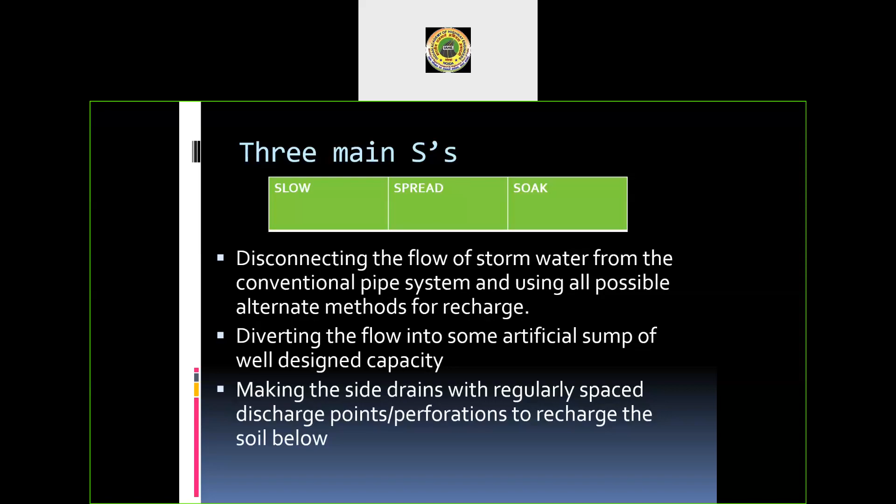Thanking you. Good morning Mr. Gupta, and all the participants who are here and already joined and likely to join. Let us make this session very much interactive. If any question comes to your mind, don't hesitate to ask, so we can resolve it then and there and proceed further. Now introduction part is over, and let us hope all participants will continue right up to the end, so that there is not a single point they miss out of this presentation.

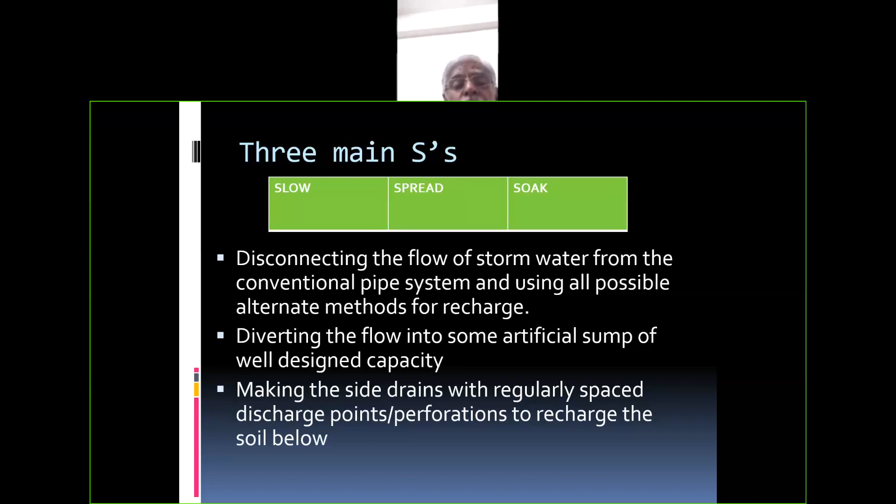Sustainable stormwater management is the topic of our project here, the subject matter we are going to discuss today. This particular thing has been of great value, particularly to...

Can you see the audio? Can you see the video? Yes sir, yes. Can you see the slide also, can all of you see it? It's quite cloudy here, maybe there is some issue with the network also. But am I audible clearly? Yes sir, yes sir, yes sir.

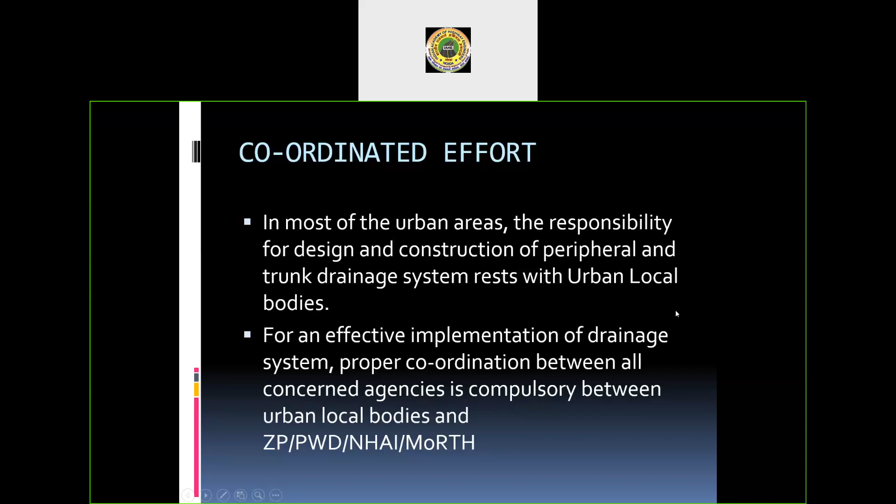Good, let us proceed. Sustainable stormwater management is the topic which is of great value to people dealing with drainage in our urban situations. Urban situations are developing cities, the smart city development we have undertaken, and all these new expeditious efforts from government as well as local bodies, which have been adding to the road width and road length in our cities. This is also of great value to areas which have large amount of rainfall, concentrated rainfall during a period of 2 or 3 months.

Maybe the current season is the befitting season for discussing this particular topic. All the rainfall that falls on the impermeable surface we create because of the widening and lengthening of roads in cities as well as rural areas - presently we find that many road network projects we do, highway projects particularly state highways and national highways, they are of...

...rigid pavement type. Now rigid pavement cannot allow rainwater to percolate down below, and as a result there is a large receiving surface which is concentrating the entire thing into the stormwater drains on both sides of the road, and then leading into the culverts or whatever cross drainage arrangements we have made - bridges, small minor bridges, rivers, rivulets - all these things are then concentrating into a final storage somewhere, maybe likely in the nearby lake or nearby sea.

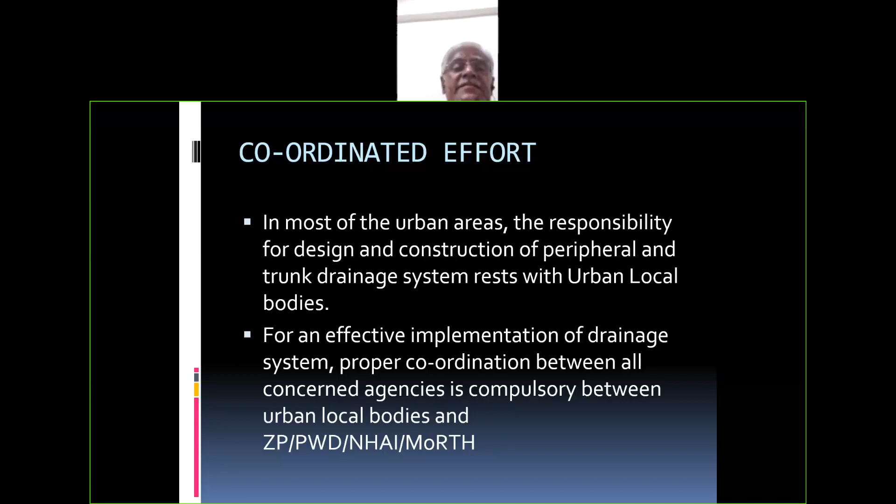Pavement, and as a result, if the rainwater weakens our soil, there is distress in the pavement which has been designed considering a particular CBR value, and the CBR value goes down because of full saturation of soil, which is carrying the embankment and the pavement on the top of it.

Now, this stormwater drainage that we have to properly channelize and manage is of importance to the rural as well as urban areas, as I already told you. But in the urban areas, we are getting more and more of stormwater because of the receiving surfaces of the buildings and other structures. And in the current scenario, we find that there are lot many flyovers, the railway over bridges and other structures, even the metro railway bridges that we have in our cities.

So these are the receiving areas, and they receive a lot of rainfall, which gets concentrated into the drainage arrangement that we make. If the drainage arrangement is not properly designed, the stormwater is likely to create flood-like situations on our roads and also on the other structures. We find that in the initial rains, there's accumulation of water on the top of our flyovers because of the clogging of those drains that are already there.

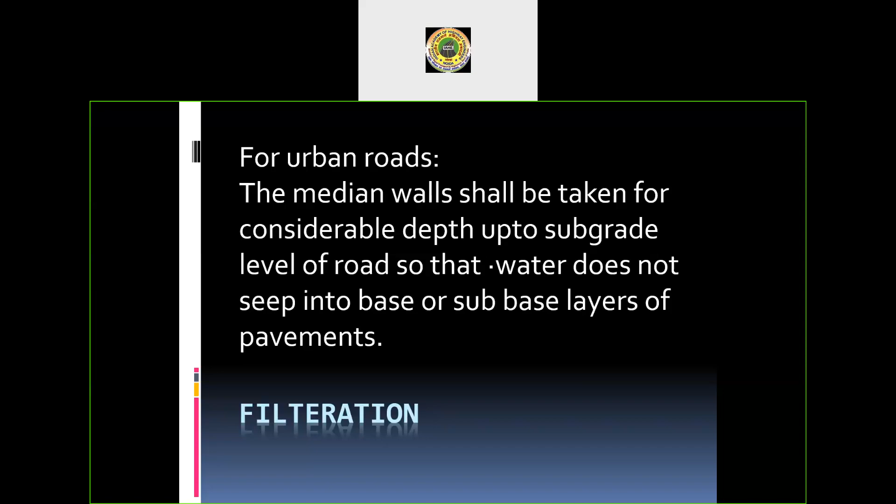So stormwater management is therefore very necessary, very important, particularly in the urban situations where a lot of population is put to great inconvenience. They can't reach their office, they can't reach their airport or railway station because of the flooding on the road, the traffic getting slowed down, and a lot of traffic jams happening, particularly during the rainy season. So this is the importance of this topic that I would like to now give you in greater detail in the forthcoming slides. Next one, please.

You can have the data from the meteorological department for the place where you are actually working. And the design is based on this collection of data for a long period of time, so that our drainage system in the cities is properly designed and that really serves our purpose during the peak season of monsoon.

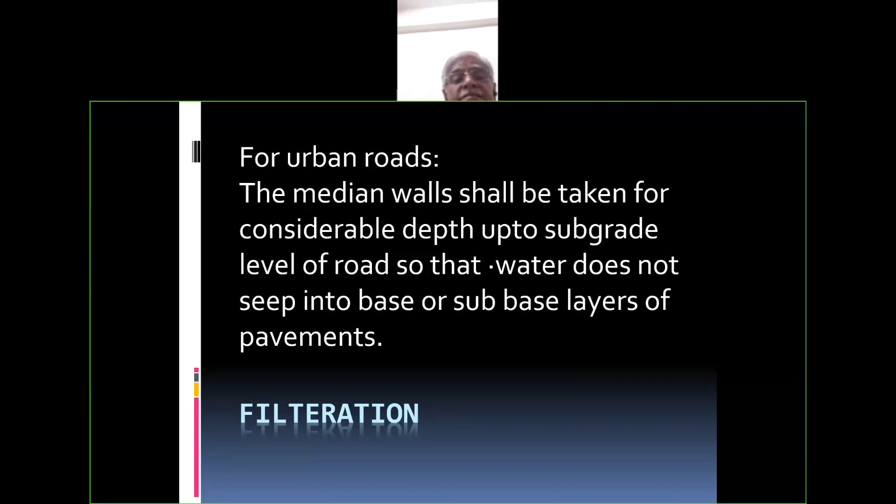That is what we experienced on 26 July when the rainfall was more than 900 millimeters in 24 hours, and that was a very big, unusual thing that we experienced in the city of Mumbai, where the population is 20 million plus.

So then the local authority, the Municipal Corporation of Greater Mumbai, started working on this. They were already having a system in place, but the implementation and augmentation of that particular system was very, very important, and that was to be done in a short duration of time. So the estimated budget for implementing the project was more than 12 billion with 2005 as a base year. Now the existing system was more than 70 years old, and as I said, lot many roads, 7 road corridors. I myself was in charge of developing them between 2008, 2009 and 2010, where we widened the roads.

So naturally, the receiving surface was increased, and that entire area was required to be drained into the nearby sea, where the water reaches through a river named Mithi. And whenever there is a high tide, and on that particular day also it was high tide, the river was not flowing into the sea, but the sea was flowing into the river. As a result, there was a reverse flow, and the entire city got flooded very dangerously, and everybody was trapped where he was. Nobody could reach home.

Actually, the entire night, I myself was in my office, sitting on the top of the table by putting a chair on the top of the table. That was the situation in many places. Many colleges had asked their students to go onto the terraces of the college building, and all that had happened.

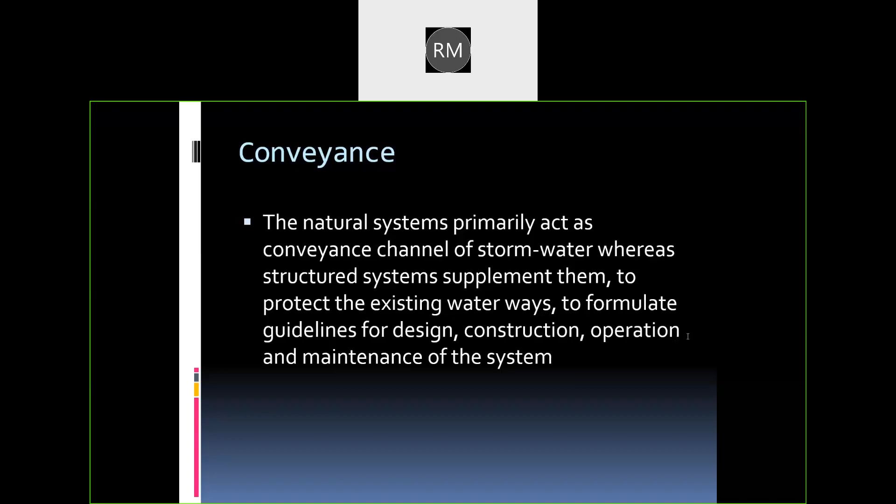There are pickup weirs that we can construct at some rivers or rivulets, so that there's accumulation of water for drinking. Some water treatment plants are to be installed, the water is to be made potable, and those things we do. But all this effort really helps us in recharging the thirsty ground.

So we should think of all these things at the DPR stage itself in a particular project, so that there is no confusion about going ahead with the storage arrangements of water all along, because we will drain into the side drains, and the side drains will have to be channelized in such a way that rainwater harvesting or conservation is possible if we plan it right in the beginning and do the digging or borrow area excavation in a planned way.

Hello. Yes, sir. Am I audible? Audible fully, sir. Okay. Good. Next one, please.

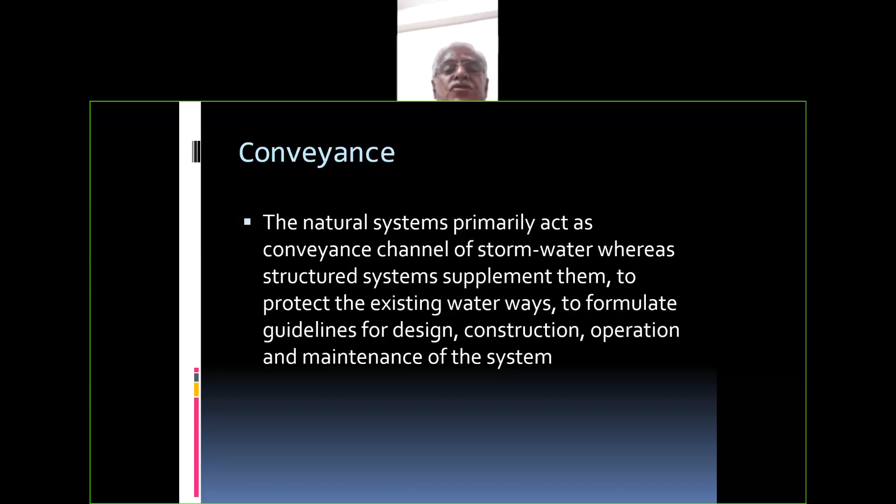Not only this, in urban areas, the urban authorities do not have a properly trained and well experienced design team which will be able to do the designing of the urban drainage. So the city engineer may or may not have such a team.

So the highway engineers can always help them by proper planning of the drainage inside the city, which normally they will allow and meet our drainage system on the highway, which may be in the form of a bypass around the city or something like that, and they try to take help of that system. So if that system is to function properly, then we must have a coordination with the local authority.

I'll ask them how they are planning to drain out and help them to plan such a thing so that our system will not be overloaded and our design will not fail. So that type of a thing needs to be done by proper planning and coordination with the local authorities wherever our highways are passing around the city or through the city, so that both the purposes of proper drainage and storage, even the rainwater harvesting, are fully and properly served during the entire life of the project.

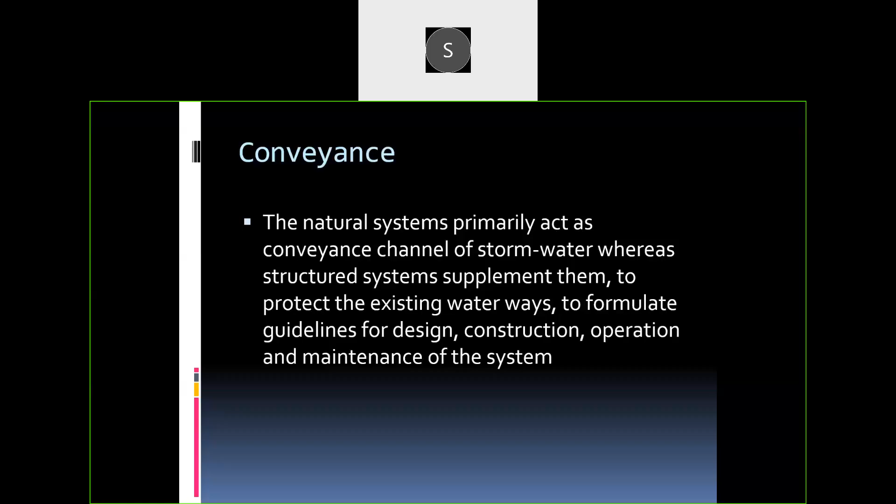So this thing we must remember while doing our own DPR preparation, and we must have a coordination with these people. And that should be a continuous coordination. It can't be just for a day or two. We must have a proper planning and execution, because they will be executing their drainage system in a particular way because of the road levels.

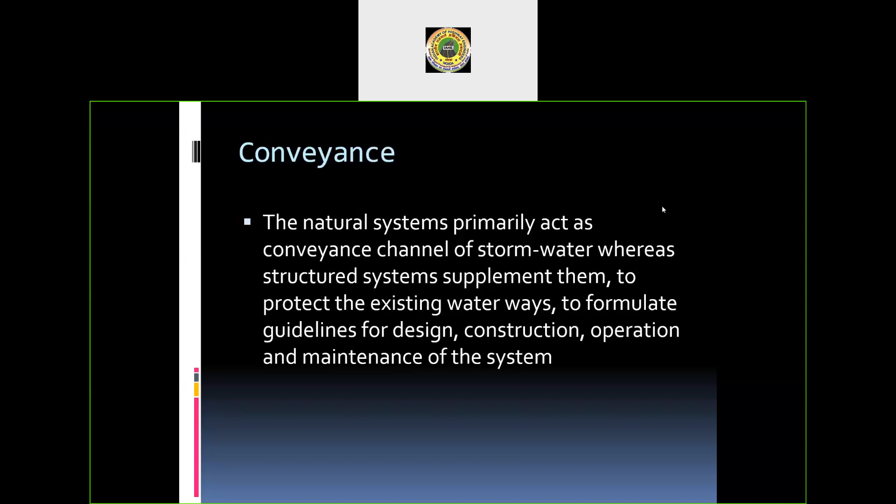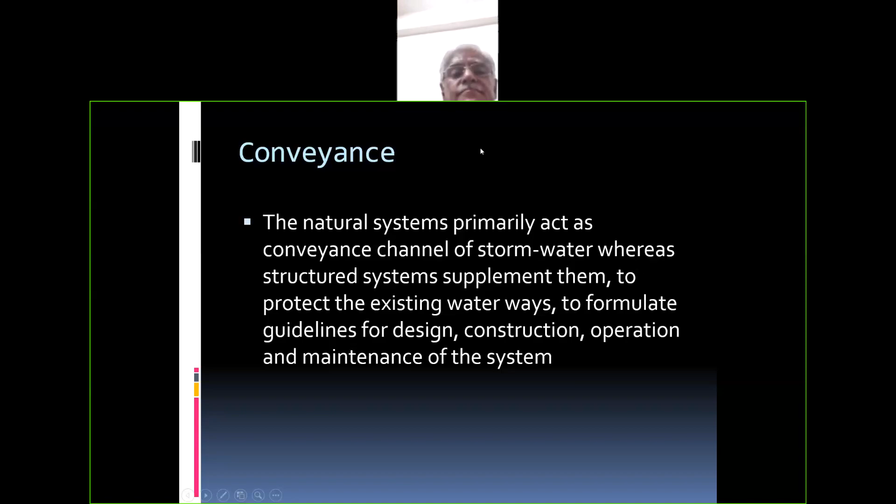Mostly in the cities, they are not much higher. They are not having much embankment. At many places, they are in cutting also. So they have a different challenge, and that challenge needs to be integrated with our highway system. Normally, we will have an embankment and we'll have a drain level which will be different from the levels which they are dealing with. So we will have to properly plan it out so that the cities will not get flooded, because our highway system is not permitting water from the city to drain out.

So that may require some storage arrangement at the end of the drainage system if the local authority have already planned and executed their system. Then we must have that type of additional arrangement of storing that water which is coming towards the highway but cannot pass through the system that we are trying to plan. So then we provide those sumps and storage arrangements in that vicinity of that town or city through which we are passing or we are bypassing.

Making the side drains with regularly spaced discharge points, perforations, to recharge the soil below, that I already told you. We need not have an impervious bottom of those side drains. We can have vertical drains, where we provide some perforations of design sizes, and we provide the permeable material, which will help percolate the discharge from the side drains.

I did not actually carry it right up to the other end of the side drain where it is discharging into the CD work, because if we overload the river or rivulet, that is also going to cause some flooding on the downstream side where a village or town is available. So that is why these three main S's are there. We have to slow down, we have to spread the water, and we have to soak it into the ground, so that recharging and other things are of help to everybody, not only to the highway engineer, but to the regular population also. Next.

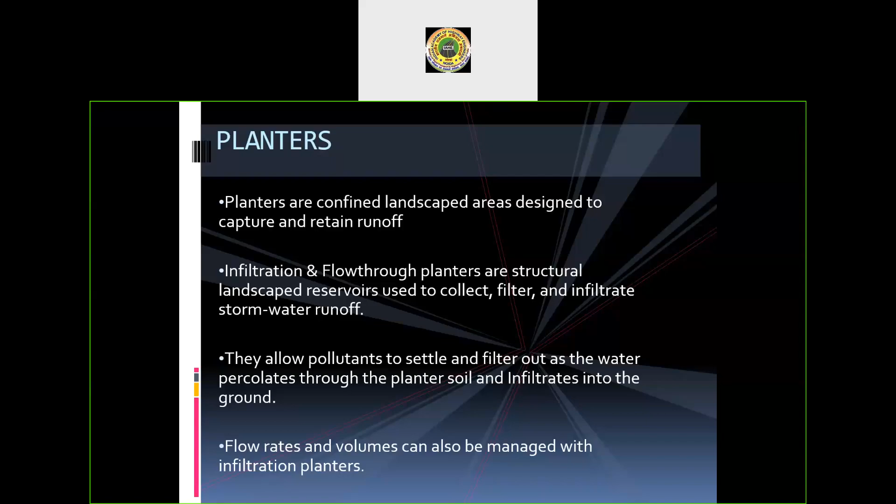Generally, the local body will have a plan for development of all the facilities inside the city, the roads, the bus shelters, and many other facilities, the hospitals, schools, and all those things for a period of around 20 years. So that is how they plan it. But we plan a highway maybe even for a longer period, because most of our highways are on a HAM basis or on the concessional basis. So they are for 30 years, maybe for 35 years of concession period.

So there cannot be a possibility of augmenting the capacity of the highway or the drainage system that we plan. So we plan for a much longer period, and there can be a mismatch between the planning done by the local authority and our planning. So we must have a proper dialogue with them, and a coordinated effort will be very necessary for all those who are dealing with projects which are in the vicinity of the urban area.

For an effective implementation of the drainage system, proper coordination between the concerned agencies is compulsory, and urban authorities like Zilla Parishad, the PWD, NHAI, MoRTH, they all should meet together, sit together, and try to plan out these things in a proper way. That will only relieve us of all things that we see, and the city comes to a standstill for a day or two in case of very heavy rainfall.

It happens not only with major cities, but also with smaller cities. So I think this coordination has been lacking for a number of years now. We already celebrated 75 years of independence, and we must now actually wake up to this particular requirement, which I think we have been avoiding. Okay, next.

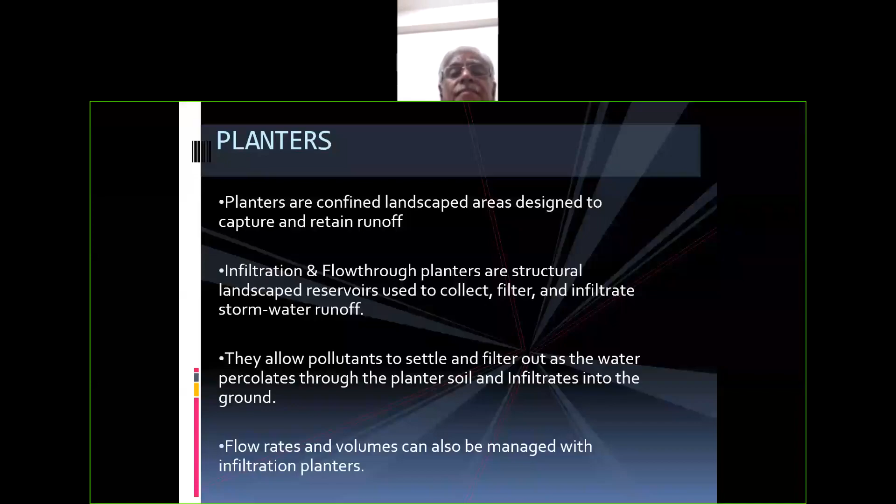So what happens, whatever water is on the other side, the higher side, comes onto the lower side, and the lower side drain at many places gets silted up, because this water will carry all the silt in the initial rainfall days at the beginning of the rainy season. All the silt will come and sit into these drains. Even if these drains have been desilted in the summertime, the very first rain will make it clogged.

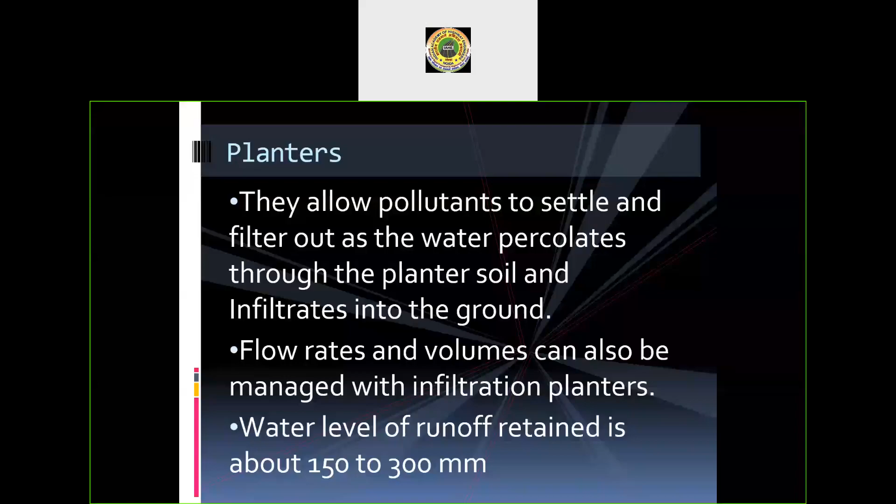I mean, all the drains which are there, the pipes that we have provided in the median, they also get blocked, and the drain in the median also sometimes gets silted up, and as a result, the capacity of that drain is inadequate, and that is how all these locations which are facing a situation like this will be giving us a lot of trouble in maintaining.

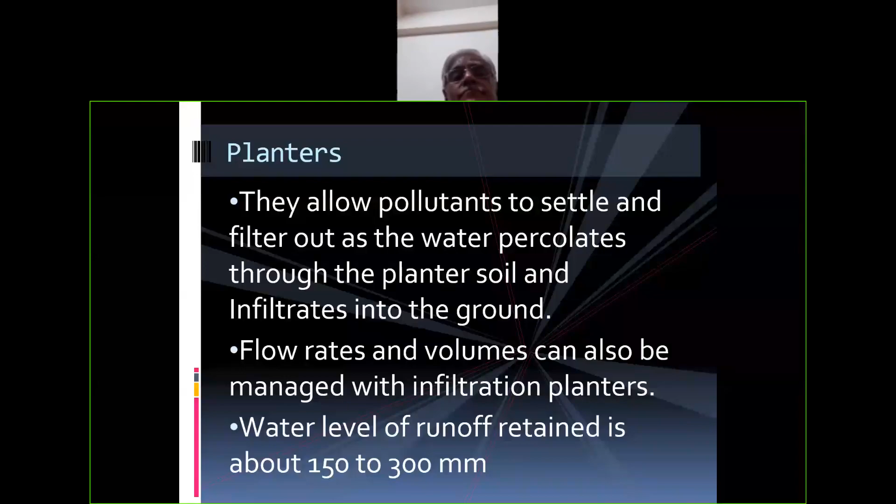And even at places in the cities I have seen, there's ponding where the slip road is there, when the left turning becomes impossible because of the accumulation of water, and the people have to go into the wrong direction or the wrong corridor to cross that particular spot. And as a result, there are accidents, slowing down of traffic, even standstills, and sometimes they come up to a chaotic condition, and hours are lost, not only of the working population, but of the people who have to now restore the entire thing in a very short duration of time.

They have to work overnight and see that the system is brought to a proper functioning condition before the next working day starts. So all these things are there, and for that, many of our people may not have availability of machinery and manpower and agencies who can do it so fast. So as a result, the road user in urban and also in the rural areas, in such situations where the curvilinear alignment is there, they are likely to suffer, and we have to avoid that. And for that reason, we must do all the planning.

We may even over design these drains. We may over design the cross walls, the median walls through which the water is required to drain into the other side, and make the drains perforated so that the water will go down, and there will be a clean road surface available for road users. So the seepage we must facilitate. We should not allow the vertical drains to get clogged, or if at all they are clogged, we must provide more and more drains, more and more vertical downtakes, so that the drainage is really effective and of use to the people who are likely to depend on that particular road portion for going to their place of work or other.

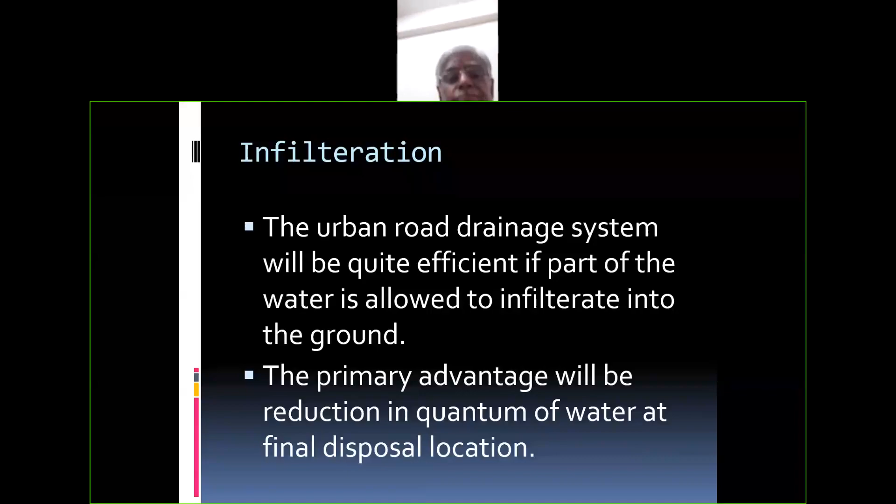Okay. Now, infiltration is the way. Infiltration is the way of taking this water into the ground. We may have a proper sub-base layer in the pavement, which will filter the water into the drain, which will allow the water to go into the drain wherever there is a super elevated road, and also it will allow water to drain into the subgrade.

Even in the subgrade, we must at times provide cross drains with perforated pipes, which are covered with what they call geotextile. So geotextile with perforated pipes has been a system of draining below the pavement, where the sub-base layer will allow water to get filtered into the ground, and then we provide systems so that water is carried across into the longitudinal drains.

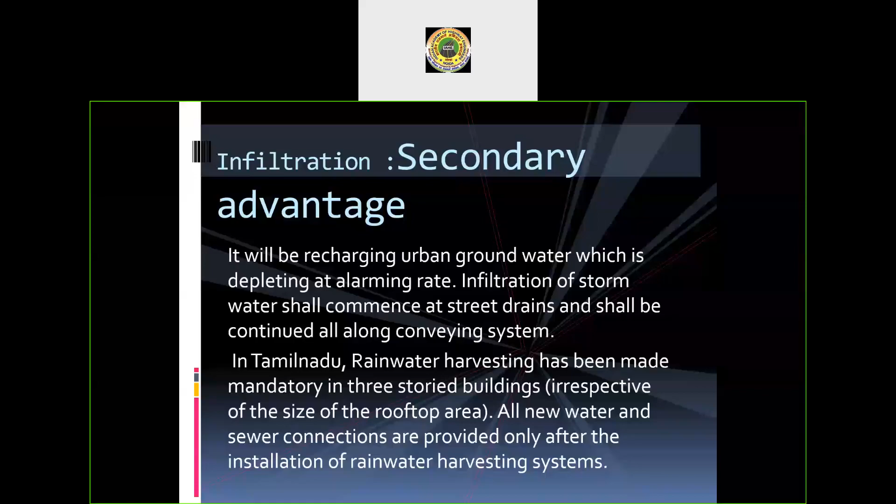This is provided considering all the geometrical and gradient requirements of the drainage system. This is a very effective way of taking care of a large or huge amount of rainwater that we receive on our impervious road pavement.

One way is to directly filter the water into the ground, that is infiltration, which we already discussed. The second one is conveyance. The natural system primarily acts as a conveyance channel of the stormwater drainage, wherever the structured system supplements them - that is, natural drainage in an area.

We provide the road gradient in such a way that natural drainage is possible. But in some places it may not be possible because of ground conditions, where there's a valley type situation, the road passes through cutting, or slopes down to a particular area, and there is likely accumulation of water. So there we have to see that things are properly designed and supplemented by a structured system, so that there is no lack of space for water to flow out in a short duration of time.

Time of concentration and rainfall, the total volume of rain we receive in a particular period - that is what we have to collect as data, so that we design the system in a structured manner and provide it.

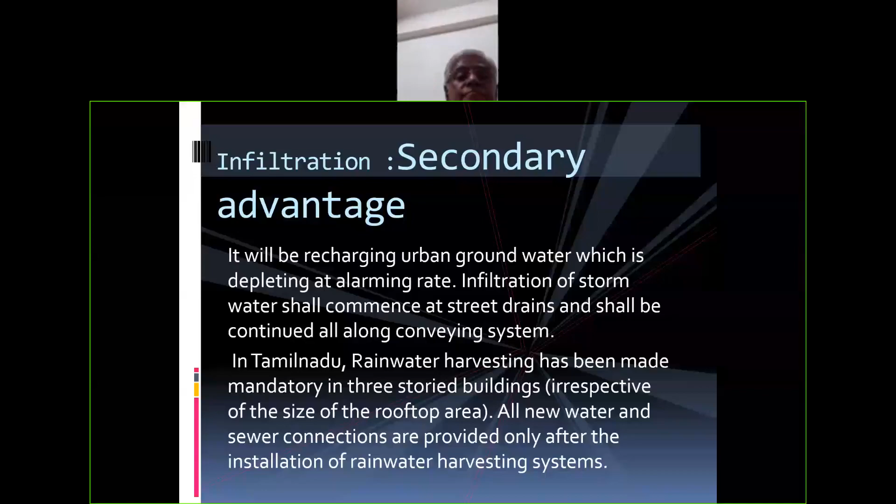These are things we must even think of at the preliminary design stage of a particular project. There is wide formulation of guidelines - there are IRC codes. All these have been made available to us. But the IRC codes will guide us only in a normal situation.

In a particular situation where things are quite different from normal, or challenging, we must ensure these systems don't fail, and are designed for a better capacity compared to what is advocated in the guidelines. Guidelines are for our guidance, not for just sticking to them and making our system unoperational.

In case of an emergency, you can imagine an ambulance waiting because it cannot cross that particular stretch of road, and things are chaotic. As highway engineers or road engineers, we cannot allow that. If that is the situation in our cities or habitable areas, nobody is going to excuse the engineering fraternity.

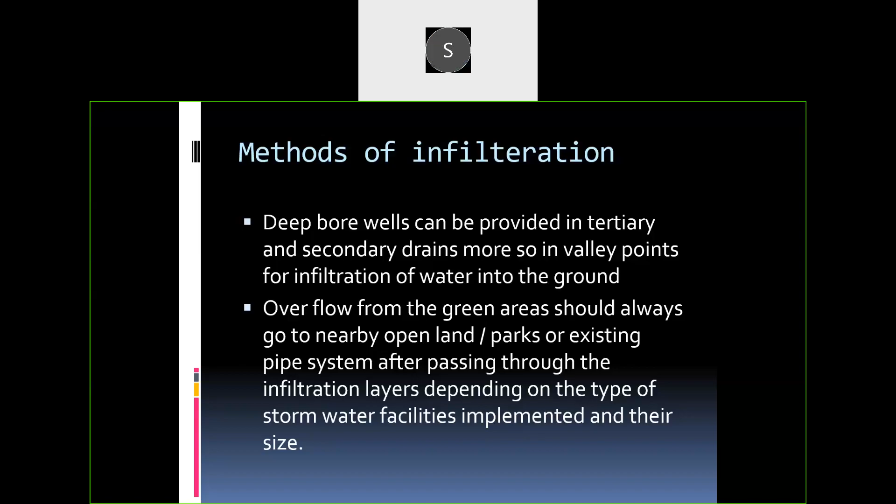Conveyance to a point which is possible - it may not be the same point that is on our site, it can be a different point, a different storage arrangement, or a point on the other side of the road where borrow areas have made storage facilities available. All these things can be integrated to provide adequacy of drainage without depending on existing structures designed and constructed long back.

So whenever we widen a particular bridge, a lot of water collects on the top. The water spouts have to drain into the river directly, concentrating all the rain accumulation on top of it before it goes into the river.

The linear waterway normally provided for the earlier 2 lane bridge is kept the same even for the new bridge, unless there is a real necessity of reconstructing the old bridge to provide a better waterway. Then we demolish the old one and construct a new one of longer length with a better linear waterway, considering the flooding conditions and development between the earlier design and the current situation.

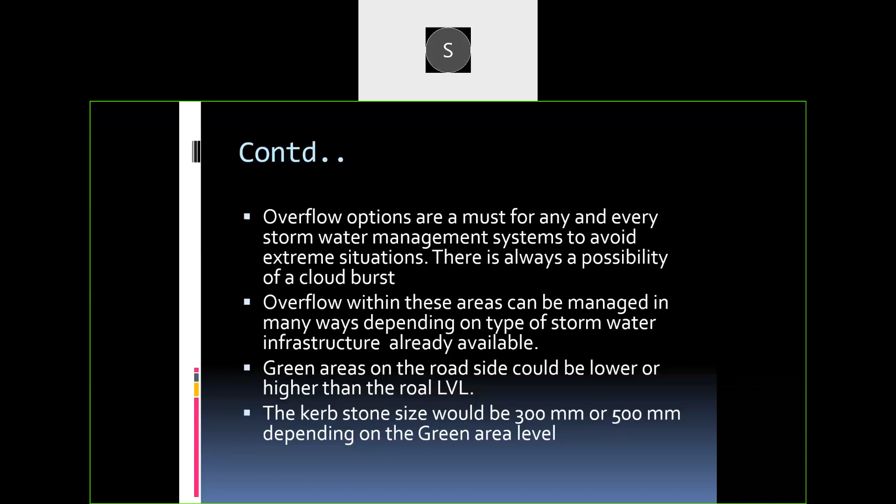So that runoff has to be captured by these planters, so that the velocity of flow is also reduced, and the total volume of flow is also reduced, so that the drainage system functions in an adequate and efficient manner.

So infiltration and flow through the planters are structural landscape reservoirs used to collect, filter, and allow infiltration of the stormwater runoff. These are things that slow it down.

We said there are three S's that we have to follow. So we are trying to slow it down, and we are trying to provide a landscape.

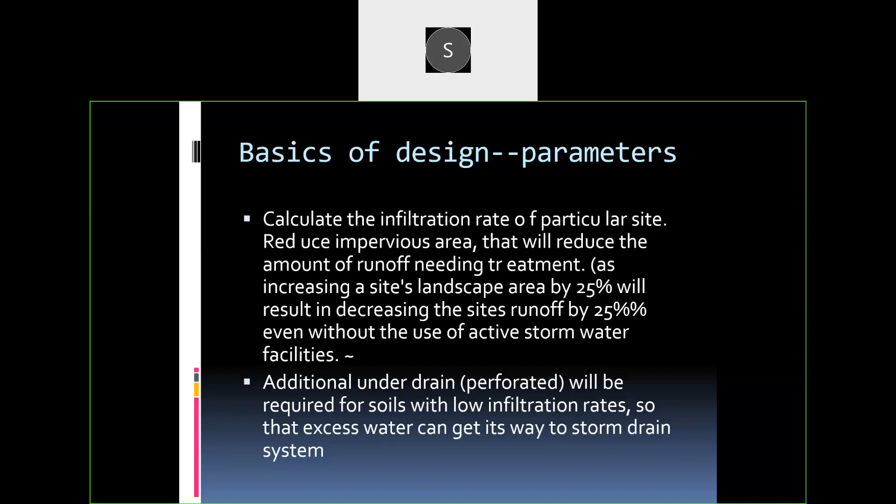Now see, wherever there are interchanges, you'll find there's a big area within the road that we have constructed around that interchange. That entire area needs to be properly landscaped, so that drainage in that area is possible, and there is no accumulation of water leading to breeding of mosquitoes and other filthy conditions that we are likely to face.

So there we have to provide and design the drainage system in a more efficient way, so that big confined areas in an interchange do not become a source of health hazard for road users or for passers by who may be staying near that area, or using it for their morning walk. All those things we have to plan so that landscaped reservoirs are constructed at such areas, so that water is duly channelized into those arrangements.

So the pollutants in the flow - that water flowing a long distance carries a lot of minerals and chemicals also sometimes. So they will allow the pollutants to settle and filter out as the water percolates through.

That is the advantage of making our highways greener: soil erosion can be avoided, and infiltration of water can be ensured into the ground through these planters. The flow rate and volume can be managed and reduced so that erosion can be avoided, and all the healthier conditions can be ensured there.

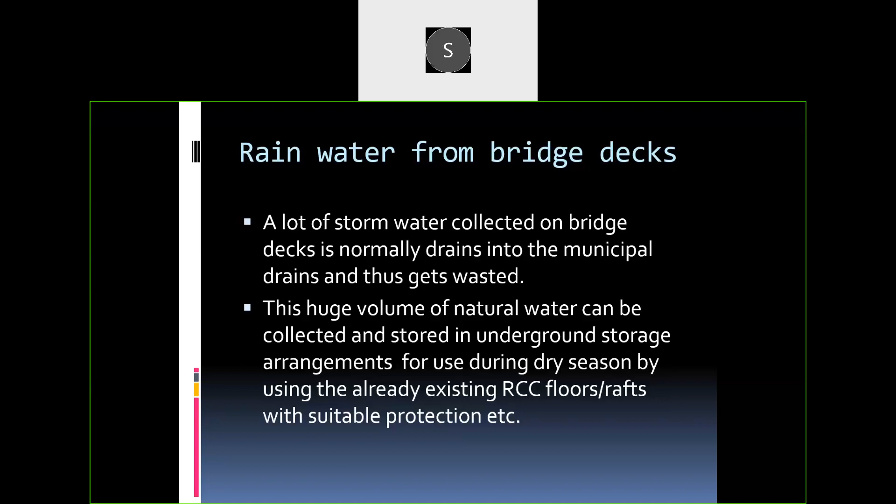This I already covered. Water level of the runoff retained is about 150 to 300 mm. Now, particularly in these planter areas that we provide, the water runoff depth of about 6 to 12 inches, or 150 to 300 millimeters, is common.

And we have to design and provide some arrangement so that water is available for this planter area to remain green, while over-accumulation is avoided and availability of water is ensured. We have to design the heights of the curbing system on both sides of the planters in such a way that sufficient water is retained and accumulated for these areas to remain green without much effort.

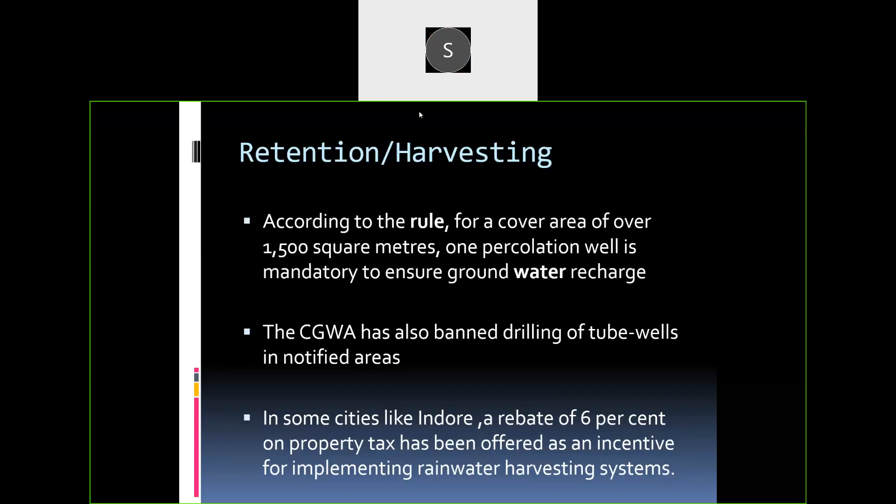Now, the advantages of infiltration we already tried to know, but there is a secondary advantage also. It will be recharging the urban groundwater, which is depleting at an alarming rate. Now, we know in many cities, I don't know whether all people who are participating here are aware, we had to send a water train to some of the villages and towns in Maharashtra in one particular summer, where no water was there. So recharging of the ground is achieved through this infiltration.

If we do it in the urban areas where the population needing and consuming water is quite substantial, and recharging has become difficult because of the impervious way in which we have tried to widen the road from compound wall to compound wall. There it becomes very difficult for water to reach the ground, and as a result, there is a great lowering of the water table, and that is a secondary advantage if we provide the infiltration arrangement in our side drainage of the roads.

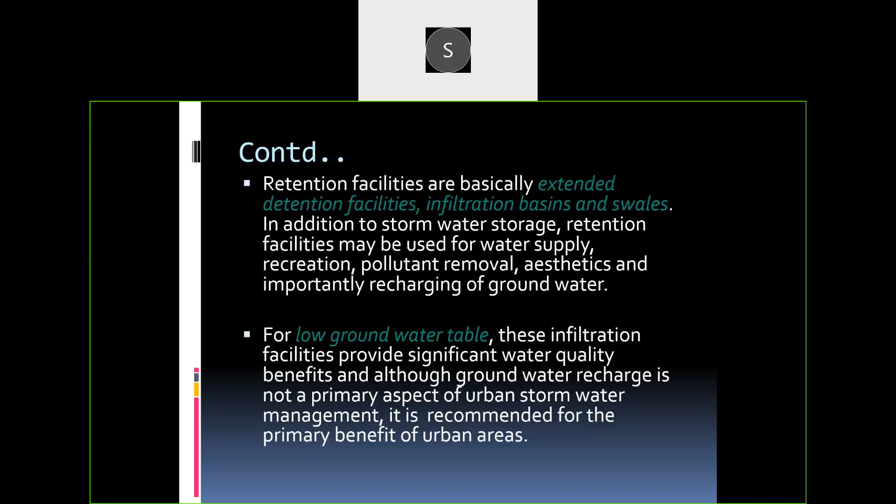So it will commence at the street drains and will continue all along the conveying system. The conveyance is to be designed so that it will be taken to a final harvesting arrangement that we have made inside the city. And rainwater harvesting has been mandatory in many cities. So in Tamil Nadu, they said if in a 3-story building, irrespective of the size of the rooftop area, you must provide a rainwater harvesting arrangement.

So these developments in a city and the expansion of the city area is unavoidable. The smart cities that we are trying to develop at many places will have a lot of additional roof area, additional surface area of the transportation system, the road system, and many other things. So as a result, rainwater harvesting becomes very important. So there's a compulsion in many cities.

All new water connections to those buildings in places like Tamil Nadu are to be provided after the installation of the rainwater harvesting system. If there is no rainwater harvesting system, you will not be provided with a water connection or the sewer connection. So that is the norm that they adopt in some cities.

There are a few more examples. I don't know whether they are included here. We will try to see. Next. Next one.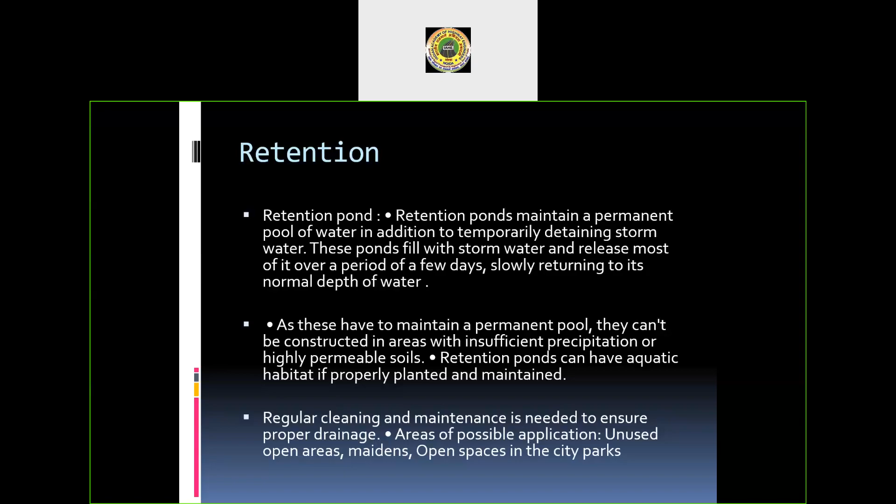From the pickup weir here also, sometimes the water is wasted. That dam becomes full. The water storage arrangement near the town has been provided by the irrigation department or other departments in charge, the water supply and drainage department. They provide it, but those weirs become full because of heavy rain in the initial stages of the rainfall itself, and then all the water is wasted and goes down. So again, a series of such pickup weirs should be constructed so that we provide more recharging of the water in the ground itself.

So there are possibilities of flooding also, because we are allowing water to go away from the storage arrangement and go down to the downstream side. There, if things are not properly protected and the flowing arrangement is inadequate, then erosion will happen and lead to more and more damage to the people who are staying on the banks of those rivers or nalas which are flowing.

So all these things add up and become very difficult to manage, a situation we have already seen on TV during this monsoon also, where many people staying on the banks of the river lost their houses. All that we can avoid if we do this infiltration, meaning drainage into the ground as fast as possible. The ultimate disposal runoff we have to reduce, and recharging becomes our focus, so water goes deep into the ground wherever possible, be it an urban area or a rural area.

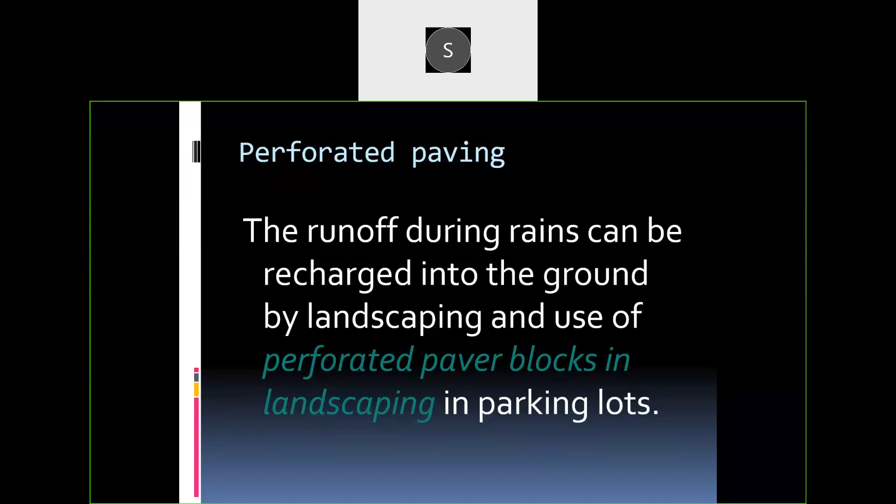Now, infiltration also we have to design with caution. If we try to store water or make it drain into the ground where the water table is already high, then it is of no use. So we have to make a conveyance system and take it to the area where there is a dearth of water or where the water table is much lower. We can see from the existing tube wells or bore wells in which area the water table is low and in which area it is high, and accordingly we design the conveyance system and infiltration system so that we provide water in an area where it is necessary.

And infiltration is also infeasible in areas with deep slopes, steep slopes, or with high clay content soil. If the clay content is high, the conditions will become very soft. The things will become unmanageable. There also we have to see that infiltration is avoided, so that water level is improved, but not at the cost of damaging our structures or our highway or the road that we already planned. Already our roads require a lot of care and effort for maintenance. So we cannot do this at the cost of damaging our own assets.

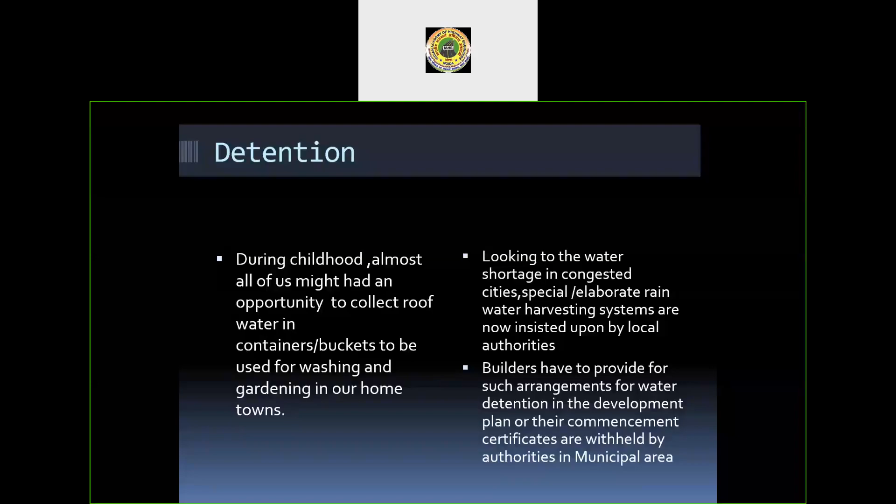So there are various methods of infiltration. Use of secondary drains, porous layers and filter material. Now we can see longitudinal drains are there. We can provide some secondary drains to carry water away from the longitudinal drains, and provide some layers of porous material in that. They provide these arrangements in the soak pit, in areas which are not properly provided with drainage arrangements or municipal arrangements for the disposal of waste. So there they provide this type of thing, the septic tank and soak pit arrangements.

So similar arrangements where porous layers can be provided in such a way that water will drain away from the main drain and away from the pavement also. Detention and retention ponds can be provided. These conveyance systems or drainage arrangements will finally lead into the detention and retention ponds that we have been discussing. And use of a porous layer in the pavement also will make water flow away from the pavement structure and go into the side storage or the side drains.

Pond. Parking lots are impervious. Can you hear me? Yes, sir. Can you hear me, please?

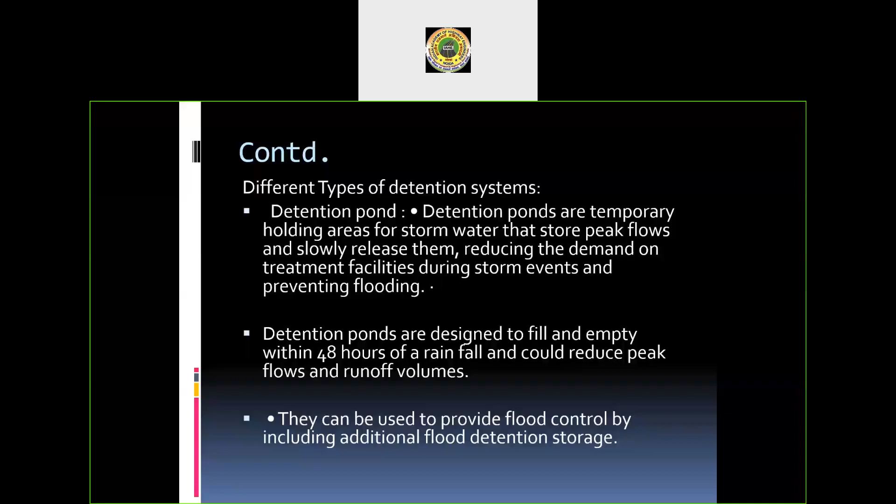Yes, sir. Okay. In the parking lot, they find that there are certain surfaces which are impervious. These impervious parking lots again add to the accumulation of water, and then it becomes difficult to dispose it off. So provide pervious surfaces, or provide vertical drains if an impervious surface is unavoidable, so that whatever water is collected in those areas is drained off quickly, and parking lots are kept in a proper usable condition.

Deep bore wells can be provided in tertiary or secondary drains, more so in valley portions, for infiltration of water into the ground. Anybody can realize this. This can help us in effective and faster disposal through the infiltration method. Overflow from the green areas should go to the nearby open land, parks or existing pipe system after passing through the infiltration layer, depending on the type of stormwater facilities implemented and their size.

The overflow in the green areas: see, in the roundabouts you will find a lot of accumulation of rainwater. Then it overflows into the road pavement area. Instead of that, we should lead it into the green areas which are at a lower level, so that overflow onto the road with silt and dust, and slippery conditions developing on the road, can be avoided. So this type of thing needs to be planned. Next one.

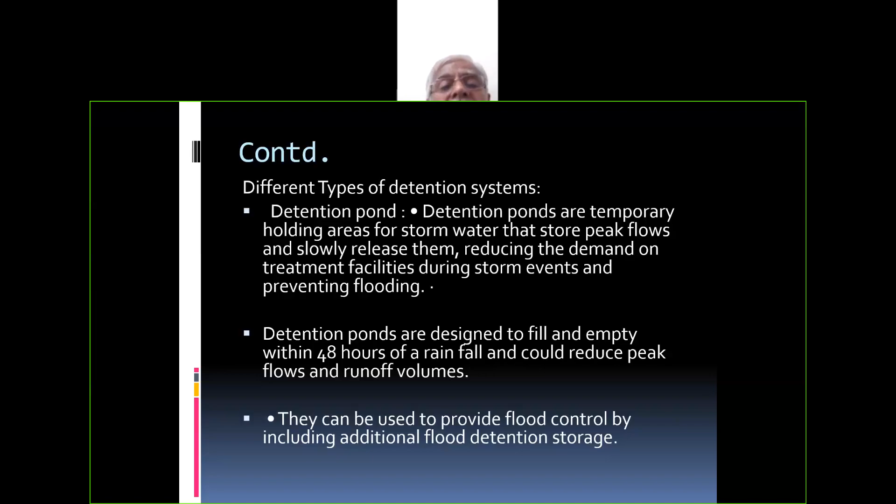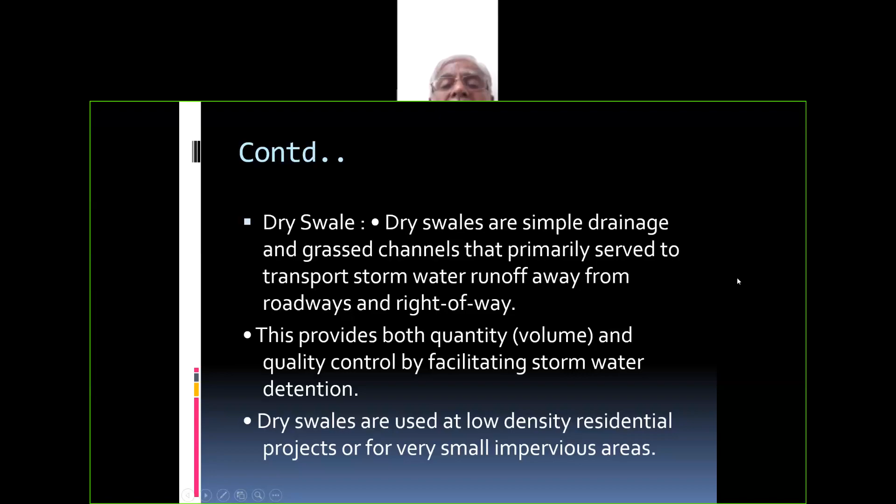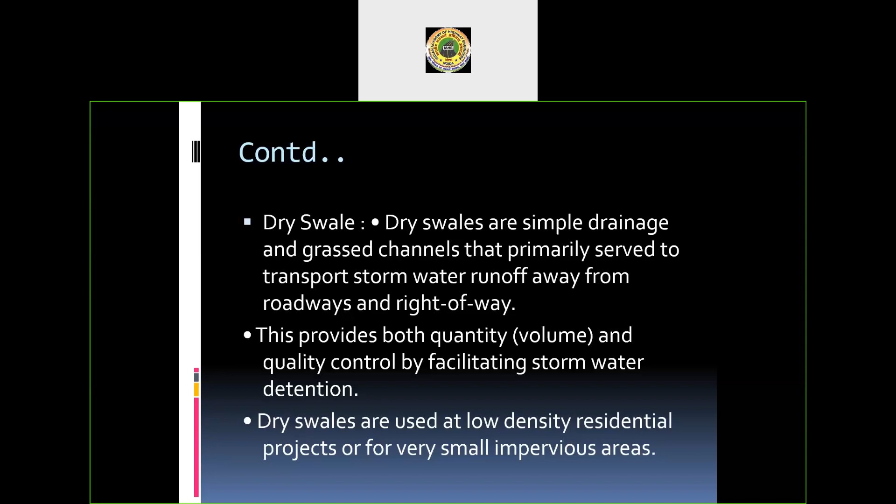This we already covered. Next one. Next one.

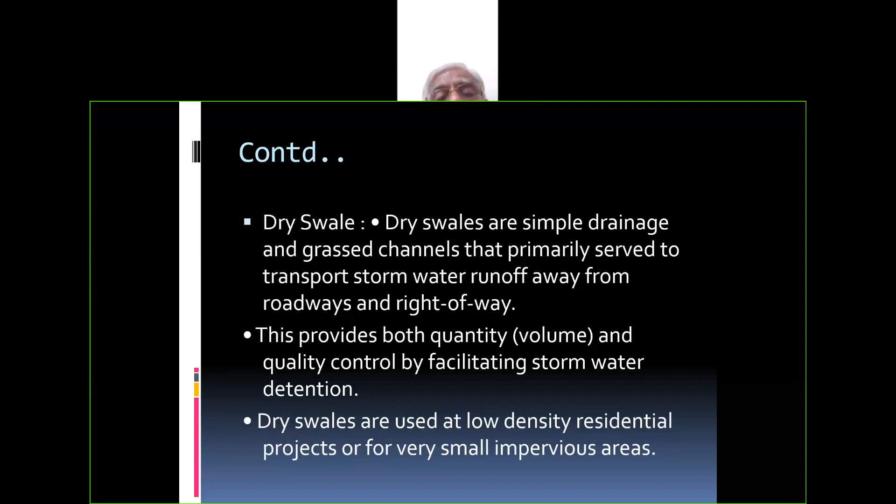So we have to provide certain systems, like I said, geosynthetic covered pipes below, so that water will be drained away, because if the total capacity of water that is retained in that soil is over, I mean it is saturated, then balance water must drain out. Otherwise it will become difficult to manage, with overflow onto the road and slippery conditions at the intersection. At the intersections we provide these green islands, which can act as rain gardens to take all the storm water from all over the area. And then it avoids the slippery conditions I was talking of.

So you see at the roundabout, because of the geometry and because of the other obstructions on all the sides, sometimes it becomes too difficult to maintain clean and hygienic conditions, even if the things have been planned properly, because of this overflow from the garden. So we have to avoid it. We have to keep those levels in such a way that even some accumulation of water will not make the roundabout unusable, and that's how we make the road safer for the road traffic.